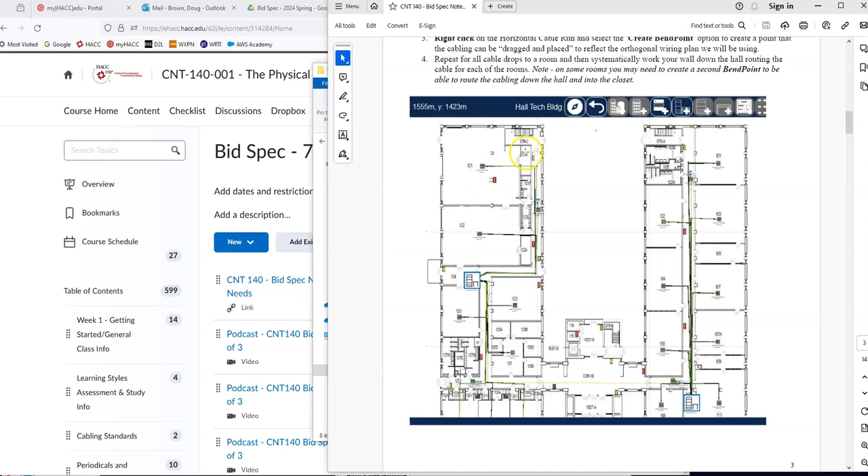To be able to start adding the trays and equipment to our plan, we need to gather some data. One of the first ones is we need to know how many feet of trays we're going to need in our building. You can actually use my numbers here if you want to, but for this, what I did was I pulled up a blank Packet Tracer file. That way I didn't have to put this over top of my cabling or anything else.

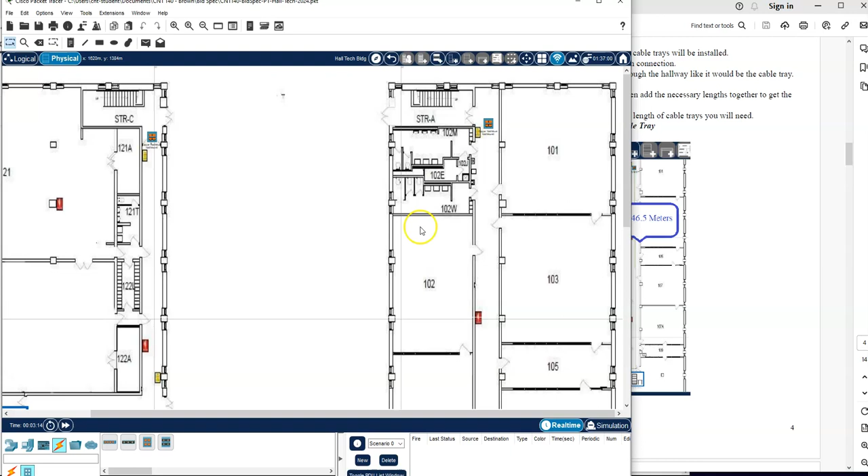I just grabbed a blank Packet Tracer file, let me get my screen adjusted here. There we go. I just put a couple outlet boxes, one at this end of the hallway, and then one at this end of the hallway. And I'm going to connect them, just punch down to punch down, nice and simple. Then I'm going to create a BendPoint here and drag it this way. Essentially, that would be the tray in my hallway.

If I hold the pointer over that cable run and look at the total distance, it says it's about 47.75 meters. Looks like when I did it here it was about 46 meters. But that would get me my estimate for that hallway. So I would hold on to that number, and do the same process in the other hallway. In this case, it takes two runs because I'm going to go this one to this one, and I'll get that measurement and hold on to it.

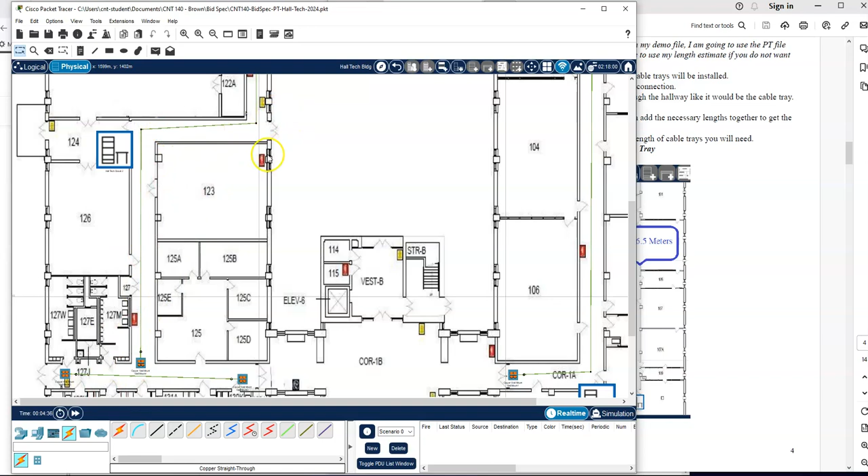That's around 14 meters. And then I'm going to do this box here, the whole way up to this end of the hallway to this box. I'll need to do two bends in this guy: bend here, and bend here. There we go. Now I have this zigzag part of my tray and then this straight part of my tray. And I can even drag this down if I wanted to.

What's the distance on this guy? Looks like 49 meters, plus this distance here, 14 meters, plus this distance over here, 47 meters. Once I add all three up, I get the distance for my building. It took us like 2 minutes, but I could get a real estimate. When I did it the other night, I came up with 111 meters of tray I would need. If yours is a little bit above or below that, that is fine.

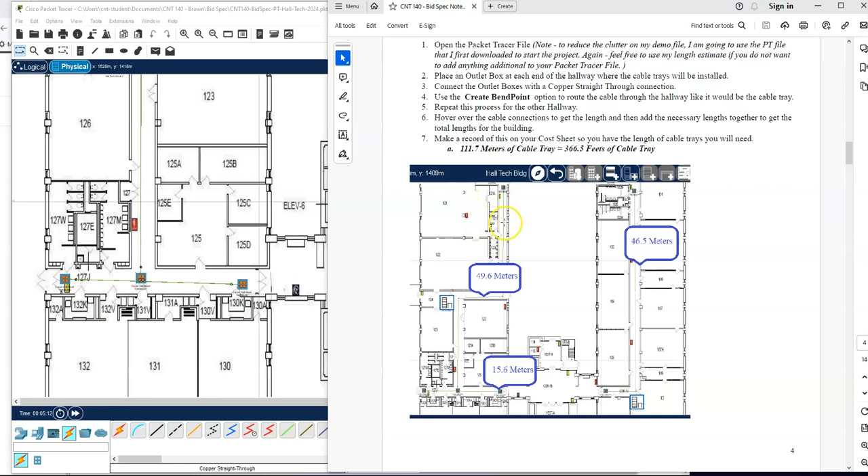Quick convert that into feet. You might need your browser's help on that one. We'll do meters to feet. Oh, come on now. Google has an option here. I can do 111.7, whatever meters it was, 366 feet. And I could round up to like 367.

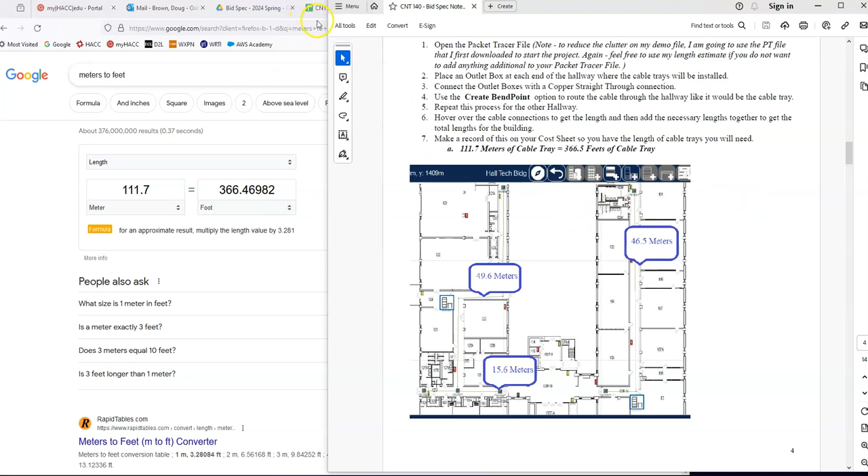So once I have that, on my cost sheet, my spreadsheet, I created a new area called cable support. The first thing I put down was cable trays, and I put that number down: 366 feet, I can even round it up to 367. So I had that number and didn't have to try to remember it. It's one of the first things I did.

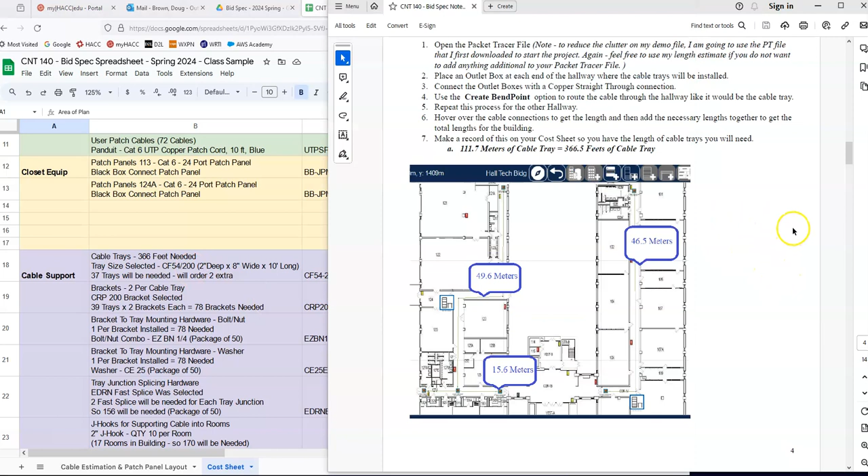Next thing I did was, okay, I need to locate the number of cables that will be in my trays in the hallway. Looking at my spreadsheet again, I'm going to go over to the estimation side and look: in this hallway we have this many cables, in this hallway we have this many cables. There's like 72 in total, but I'll get a quick look here. 1, 2, 3, 4, 5, 6, 7, 8, 9. 9 times 4, plus maybe 2 more.

So that'll be for that hallway. And then over here, 1, 2, 3, 4, 5, 6, 7, 8. 8 times 4, so we have 32 plus 2 more, 33, 34. So it looks like both of these are just under 40. So I would know what each of these trays needs in either hallway we're looking at.

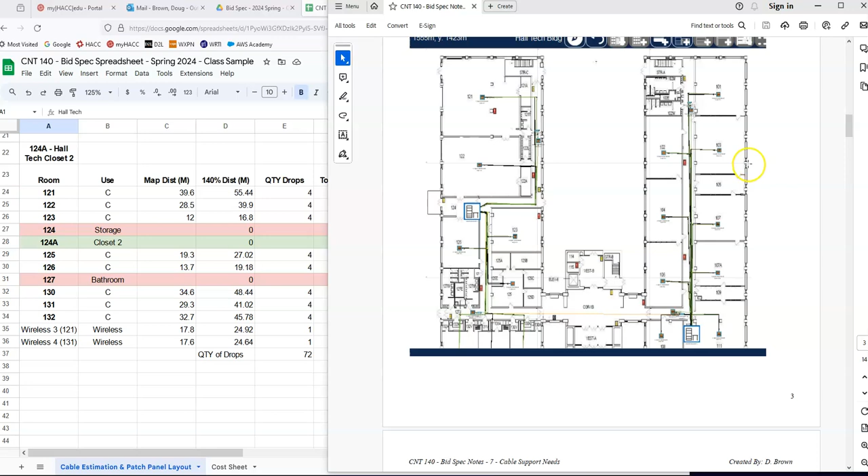This hallway over here or this hallway over here needs to support about 40 cables, which is not a lot, but when you get a bundle of cables together, it's a lot of weight. So we need that number to know what kind of weight we're dealing with, and that's going to help us pick our tray size. So we have about 40 drops in each hallway.

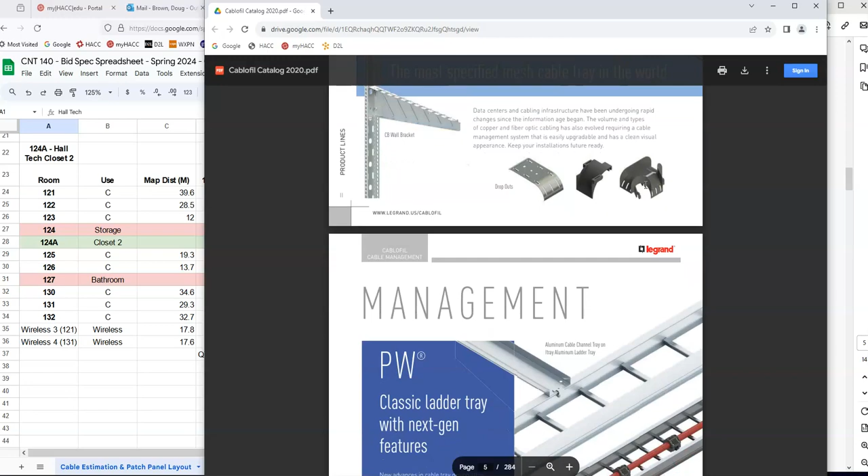Good. Now that we have that, we're going to look at our cable tray size, what size of cable tray we need. Now, I actually have reference to this, which is basically the Cablofil catalog. I have this on my Google Drive, and I just have it linked for you. As you scroll down through here, one of the first areas they have is the general overview. Here it gives you the data cable fill table.

Now I also have that linked. We'll go to D2L. It is linked right here for you. Data cable fill table, I have it created as a graphic right here for you. We need that to know what size of tray we're going to select. So I get it from their catalog or whatever manufacturer I'm working with, and I would say, okay, if I'm dealing with 40 cables of category 6 plenum, if you will, okay.

If I look over here, category 6A maybe. If I'm only doing 6 now, maybe I look at 6A down the road. Here I see 40 cables. I could do a 2-inch deep by 4-inch wide tray. But that would mean it's full today. What we want to do is at least make sure there's room to double our cabling. So I'm going to look at double that, about 80 cables.

So an 80 cable tray, I could do a 2x8, 2-inch deep by 8-inch wide. And I know I could support twice what I'm using right now. That would give me a good ballpark to start with. In real life you could maybe upscale another time or two if you think you're going to be in this building for 10 or 20 years and want to make sure there's plenty of room. But this would at least give you a reasonable size to start with. So on mine, I picked this 2-inch deep by 8-inch wide tray, figuring that's double what I need now, so I'm pretty good for down the road.

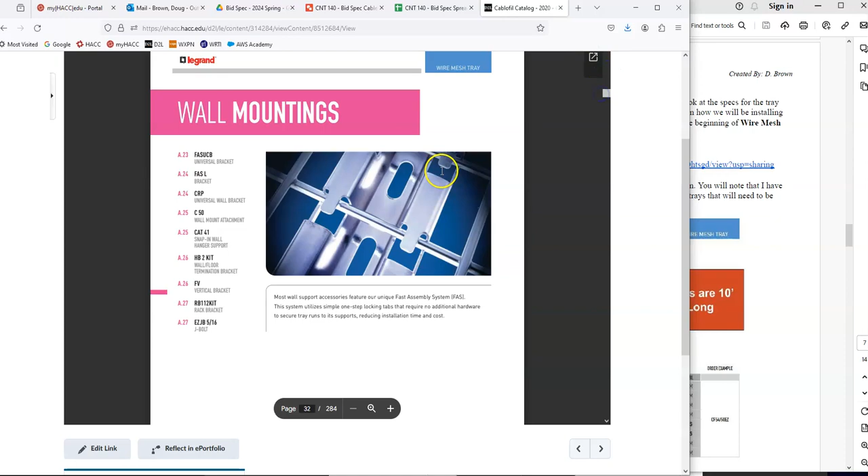Here's your CF54 2-inch deep tray. If I look at the length of them, they'll show that they're 10 feet long. Okay, now that I know they're 10 feet long, again, I'll record that information. Now that I know they're 10 feet long, I know I need 366 feet of tray. So if I buy at least 37 trays, I know I'm okay.

I'm going to order 1 or 2 extra just to be sure. So I know that I'm going to need about 39 trays to do this building. Okay, that's how I get an estimate for that. So now I have the first piece of information I need there. Once I have that, here I had the quantity of cable trays needed, so I have them in my spreadsheet now. CF54 200, I have the quantity there now.

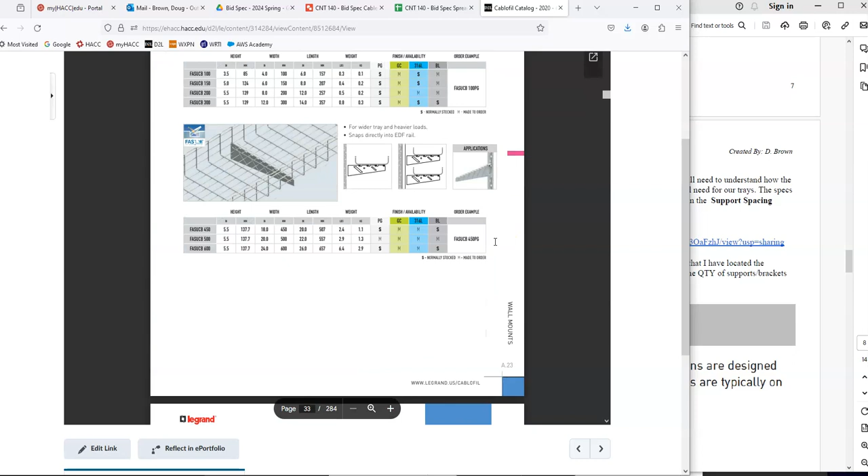So now I'm going to look at how I'm going to anchor these things. Well, again, in the catalog, there's different ways I can anchor them. If I go back here, I'm going to scroll down to the next section. Here's splicing. We'll get to that in just a few minutes. Here is wall mounting. There's a number of different types of brackets that can be used. There's a universal, there's an L bracket.

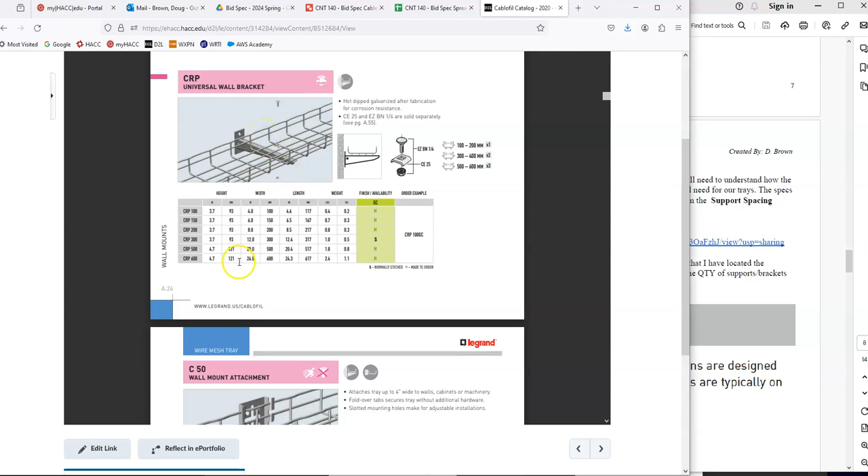This is the one we're going to use, that's kind of like a universal reinforced bracket. It can handle even a 24-inch wide tray. It can handle a pretty large tray. But there are other styles of wall mountings, vertical mountings. There's even ceiling mountings. So depending on where you're installing, there's different types of brackets to do this. Well, we're going to look at this style here. That's the style we're going to use.

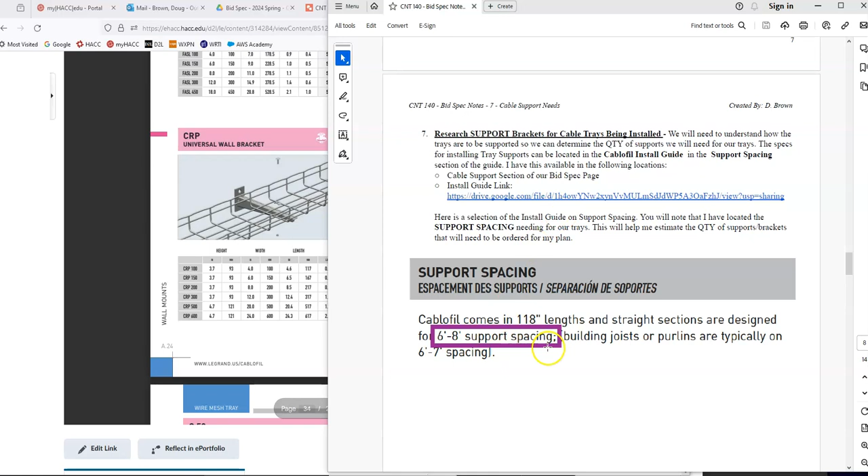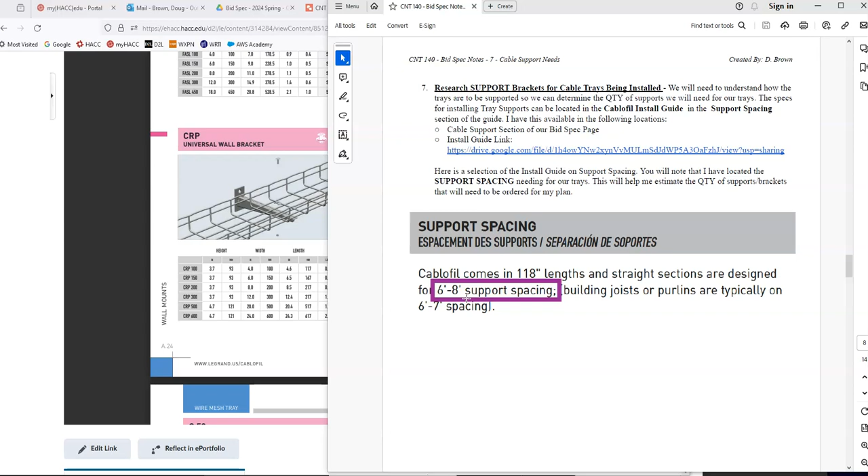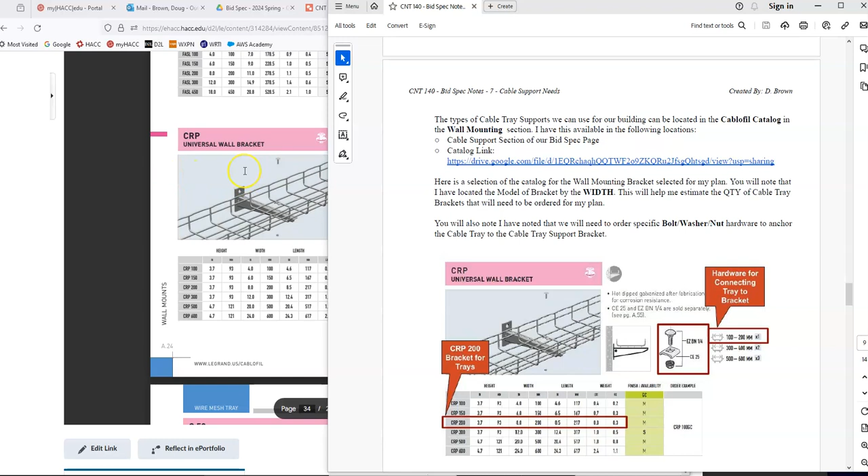And I also have the install guide in another link here too. The install guide tells you that these trays should be supported every 6 to 8 feet. Well, if you have a 10-foot tray supported every 8 feet or 6 feet, you basically need 2 brackets per tray is what it boils down to. So I know I need at least 2 brackets per tray, and here is that reinforced bracket that we just found. Okay, so on my spreadsheet again, I know that I have brackets 2 per tray. I located the CRP 200.

Let me go to my catalog again. Here's the CRP. If I select the 200, that's the 8-inch wide one. CRP 200, that's the 8-inch wide bracket. I know that right there would support my tray, and I know I need 2 per tray. So right there I have brackets 2 per tray, with the CRP 200 bracket selected. So I know that I need at least 39 trays. So 39 times 2 brackets each, 78 brackets at least. Okay, so I need at least 78 brackets. All right, we're getting there.

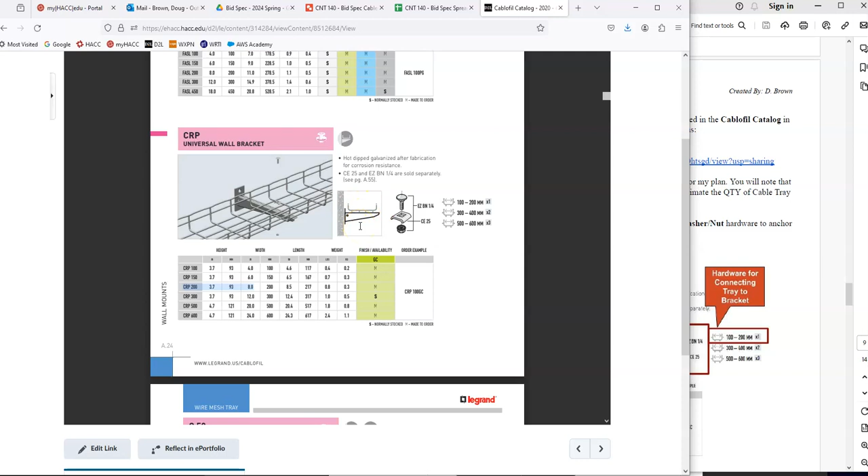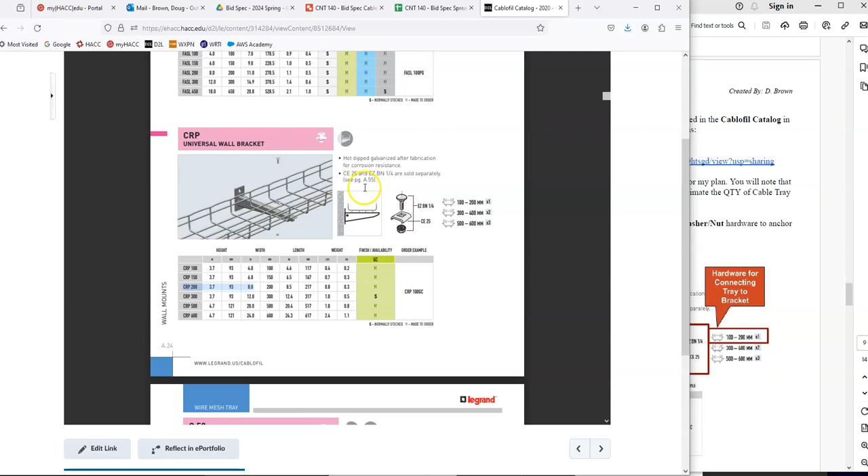While I'm looking at that, on the catalog, it actually shows me some hardware that I need to anchor the tray to the bracket. This is this bolt, nut, and washer combo. And it's a cup washer, so that way it kind of goes over that wire basket and anchors to the bracket. And if I take a peek at that, it tells me that for trays that are up to 8 inches wide like we have here, I just need one to anchor the tray to the bracket. So I would then know I need 1 bolt, 1 washer, 1 nut per bracket.

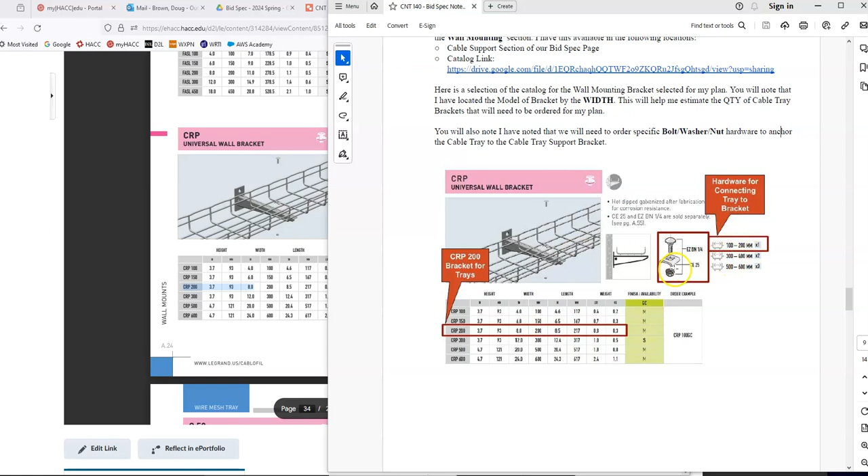And that's essentially what I did right here. I said here is the bracket to tray mounting, and here's the 1 bolt and nut combo. I need at least 1 per bracket. And then I need the actual washer. So we have the EZ BN 1/4, and then we have the CE25. The EZ BN 1/4 is the quarter-inch bolt nut, and then the CE, that's basically that cup washer, and I need 1 per bracket. And when we look those up, we'll find out how they're packaged. But again, I'm just trying to record these things as I go.

Okay, and I'll add them to my plan as well, and I've broken them out here for you of what I picked. Here's the EZ bolt nut combo, and then the washer combo. And I'm just putting down what I need per bracket. All right. When I come back in the next one, we'll talk splicing and then start looking up some model numbers.